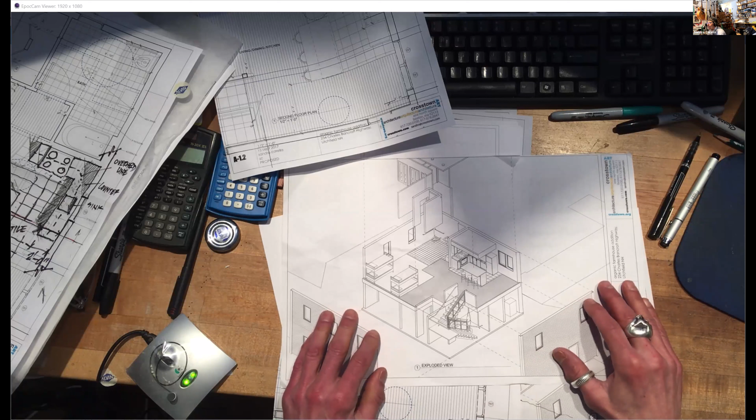Sorry about that. So this is an addition to a house that I designed in New Hampshire. Actually, one of our undergraduate students lived across the street from it. So I'll do a little bit of show and tell about this project. Let me share a different screen.

So now I'm sharing an internet browser. If you go to any Google engine and type in 234 Charles Bancroft Highway in Litchfield, New Hampshire, it takes you to this street view. Across the street from the house is this school.

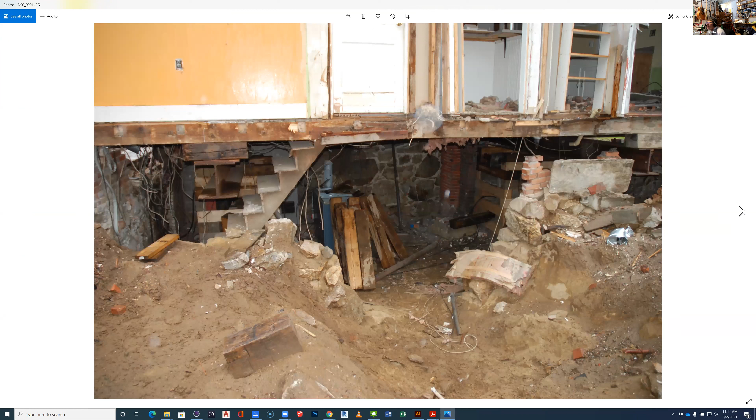So this is what we did. I found a company that was able to do this. This is what the house was like in the basement, as we dug out around it before lifting it up. So it was very, very tenuously founded. The foundation was very, very, very coarse.

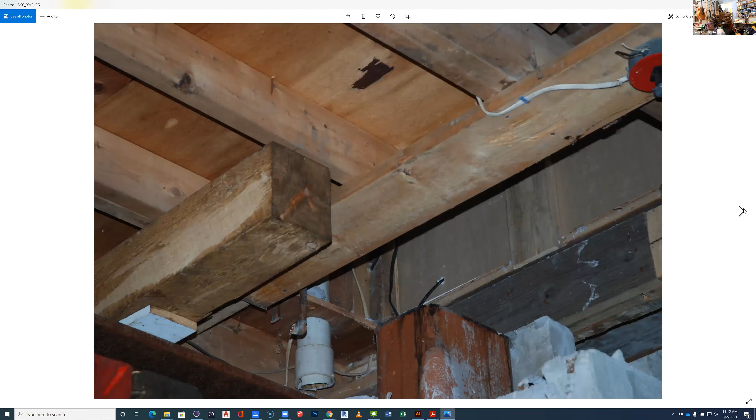So we started digging up around it. And these are the guys. This cost about $7,000 to do.

I took a bunch of pictures beneath the house, because in order to hold the house up, I had to design a new set of columns and basement. So this is what's called cribbing—wood blocks, piles of wood blocks that are railroad ties, just sort of piled up one on top of the other that the house would rest on, right?

And somewhere I have this on film, but I couldn't find it. When the town learned that we were doing this, we went from public enemies to town heroes—people were inviting us home. And I learned something really, really important when doing this. That's my pickup truck way back there. I miss that truck, I crashed it.

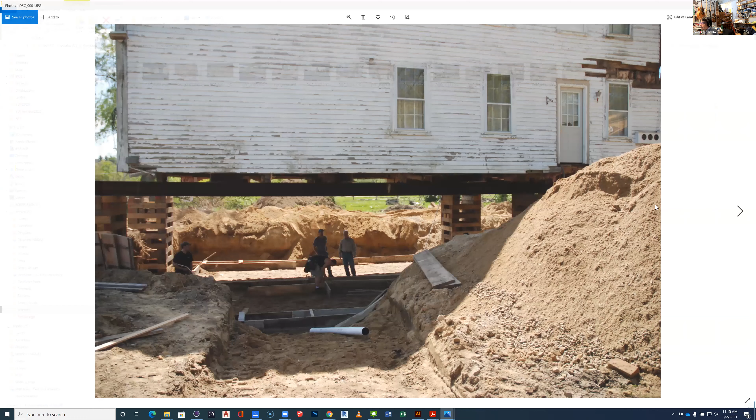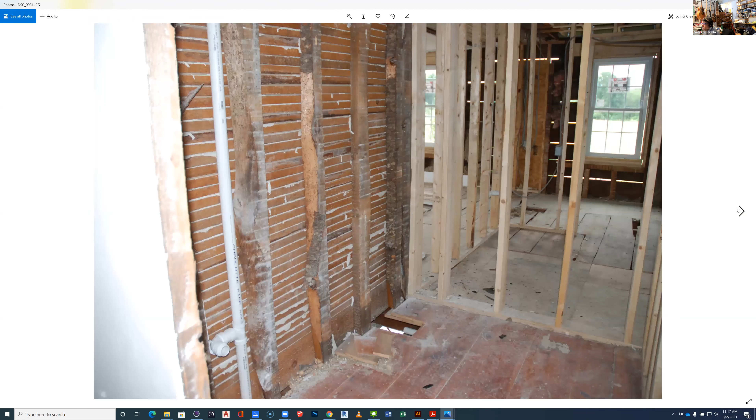This is all going, I'm explaining all this for a reason, and it has to do with diagramming. And I'm going to show you a picture.

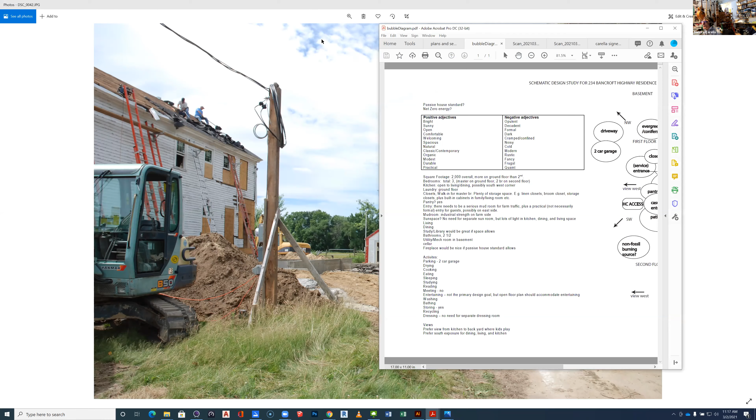So do you see a PDF drawing now with a diagram? Okay, so I'm showing the screen. So before I started anything here, I basically tried to get an idea of what the client needed.

I don't expect you to do as complex, this is what's called a bubble diagram. And what a bubble diagram does is it creates sort of an item list of program elements that your proposed intervention is going to have. Most importantly, it indicates relationships among those things, right?

So the drawing of the original house, these are plans that show the new basement, which is over here on the left, and how the first and second floor of the house were going to work. That's phase one, was to renovate, right?

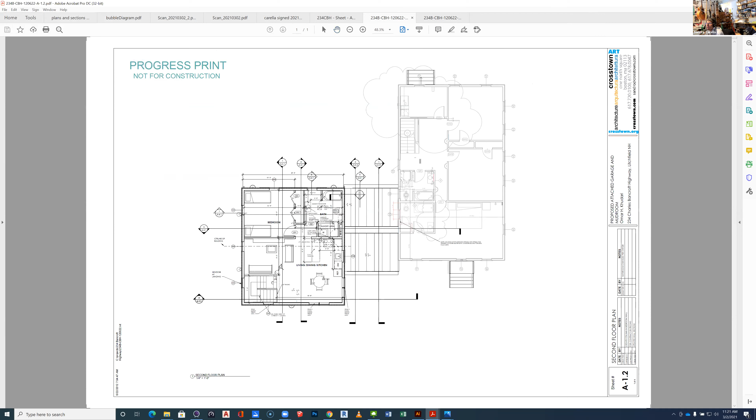Okay, looks a little bit different than that. I did something slightly different than that. But for the most part, this is what was constructed.

So what about a bubble diagram? I'm going to share now.

Remember that, and you have plan drawings of this house, right? For the most part, we focused, we're going to focus on the kitchen area, and that's what we're drawing in from different points of view. So let me share.

Let's go back to the maps again, right? So you can see what was constructed here, right? So for purposes of this class, I make believe that all this stuff isn't there, and we just sort of highlight the different aspects of this house.

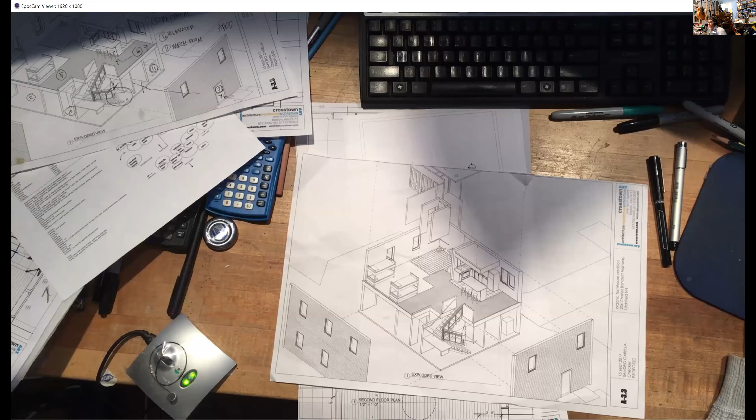Okay, so let's go back. So what about the bubble diagram? Well, the bubble diagram that I used for the house was much more complex because I had to describe the old house and the new house and all the things that went with it. And I can show you that.

But what we want to do for this house is create an inventory of the elements, the design, the programming elements in this house. And it's really as simple as imagining yourself walking through the house. Let's imagine that we start.

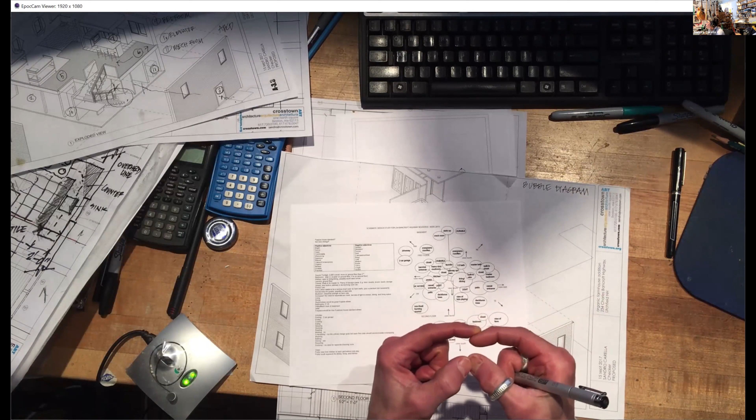So we want to create a bubble diagram. And the bubble diagram is not a scale drawing, right? The diagram doesn't represent things in relation to each other in accordance with how large they are relative to each other, but they indicate proximity, relationships to each other. So we start with just identifying what are the parts of the house.

Entrance, right? I don't know why I'm getting... oh, I see. You could think of this as a narrative.

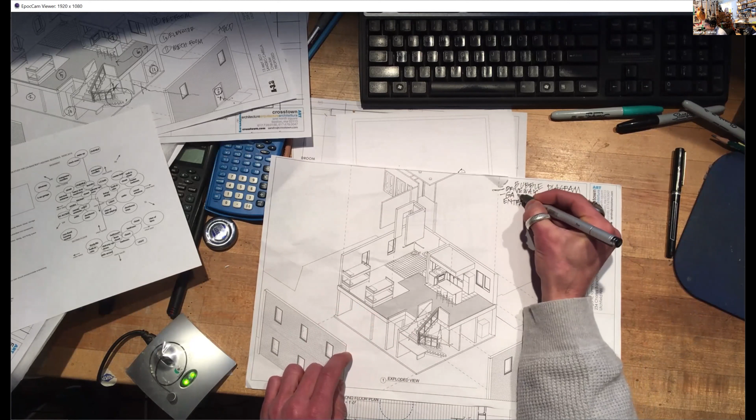How do I experience this house? Really, when I go to this house, if I look at the place in New Hampshire, I really ought to start with driveway, right? Because I drive up to the house. And then I enter the garage. Then, depending on if I drive a car into the garage, let's number these: 1, driveway; 2, garage; 3, entrance.

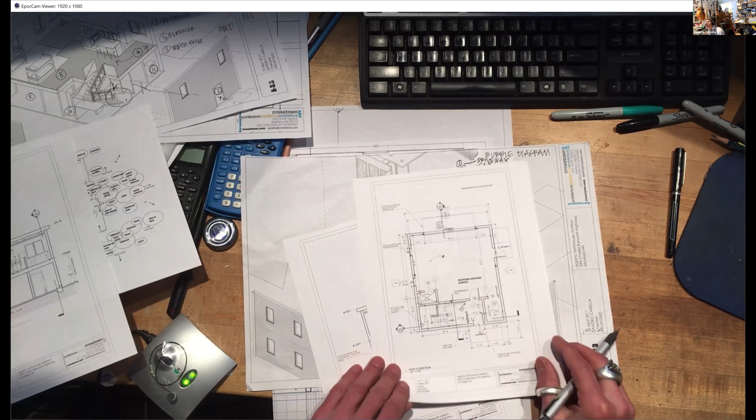There's more than one entrance, right? If I were walking from the street, right? And again, remember, I'm ignoring the fact that this is actually connected to the house, and there are doors on the other side, and we will back and forth be referencing the plan drawings. I don't think that I sent you both the first and second floor plans. I have them here, and I think I posted them up on Blackboard. Okay?

But consider this. If I drive into the house, I enter into the garage, right? So we have an automobile here. This is a garage. That's number 2. Then I have an entry from the garage, but I also have an entry from outside, right?

What else have I got here? What are the other elements in this house? Well, in this house, I have an elevator in these drawings. We did not build an elevator into this house. Surprisingly, one this size actually fits. And again, that was to present you guys with an accessible solution to this simple 2-story house. So we have an elevator, that's number 5.

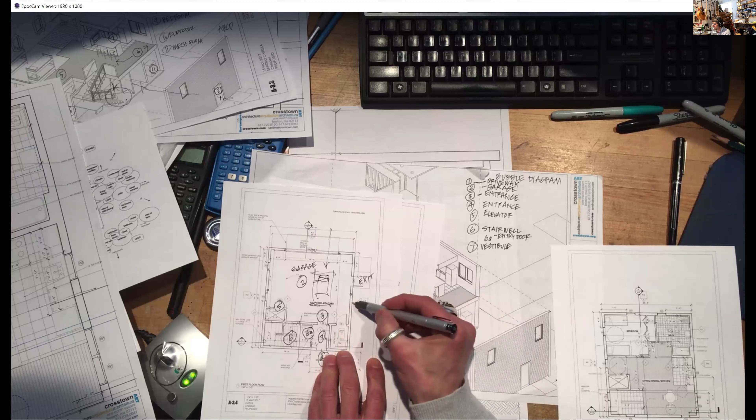I'm looking at this drawing and I noticed something that I forgot. There's another entry/exit from the garage, and in the real house this actually goes to the breezeway. Breezeway is a term used to connect buildings that aren't otherwise attached. Sometimes they're enclosed outdoors.

I just discovered that my pen comes apart. I think I'm going to use a different pen. What a stupid design.

Let's go to the second floor. Oh, did I identify the stairway? Yeah, so when I get to the stairway is when I begin to enter into the house. So this you have a plan of.

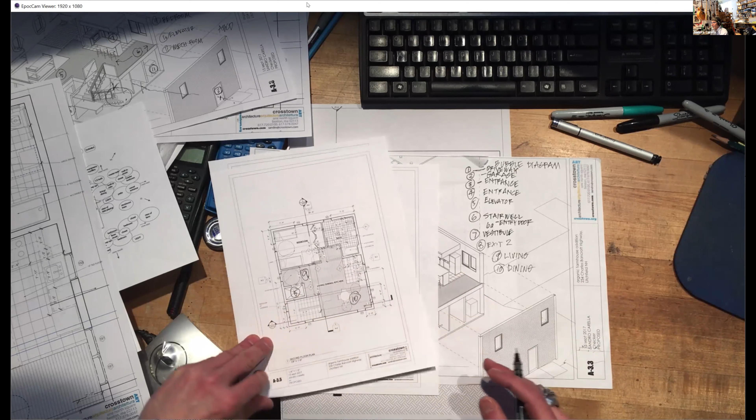The elevator occurs here as well. Remember, an elevator—you guys aren't responsible for constructing an elevator. But in terms of planning for an elevator, you have to draw every place that elevator stops. So if you're drawing a floor plan of the first floor and the second floor, you've got to draw those elevator stops, and then whoever the elevator manufacturer is, it's his or her business to figure out how to build that. But for all intents and purposes, you have to allocate the amount of space and the walls that surround that elevator. So your job is that.

I've had students agonize over how do I build an elevator—I don't know anything about elevators. You don't have to build an elevator, but you have to indicate where the elevator stops and the walls, the wall enclosures that wrap it.

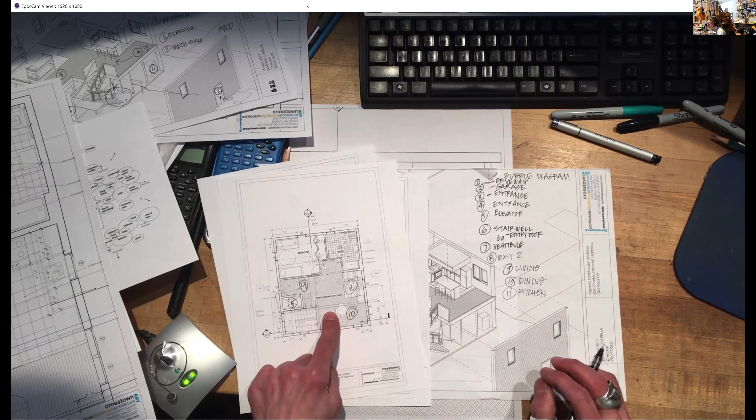We have a kitchen. Some things are missing in this drawing because—I'm not sure why, but I'm missing the island.

There's a bathroom, and a bedroom. What's that?

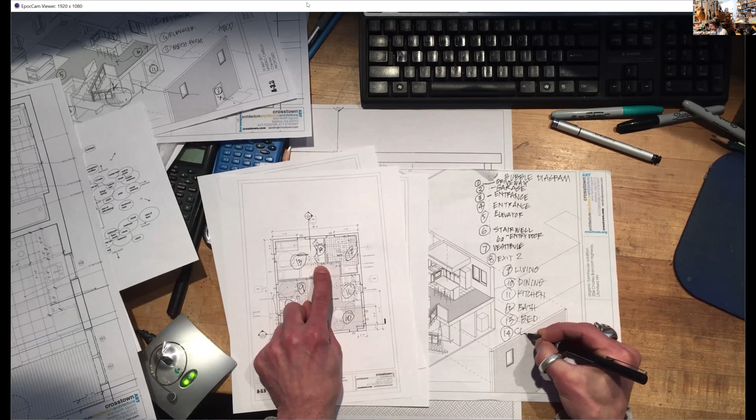Let's see if I left anything out. Let's go. That's a mechanical room. I'm just using numbers, but that isn't necessarily important.

So this is a list of the elements in my—HVAC means heating, ventilation, air conditioning—otherwise known as a mechanical room.

I left out exit 2. There's another door over here. So at some point you have an inventory to construct a bubble diagram.

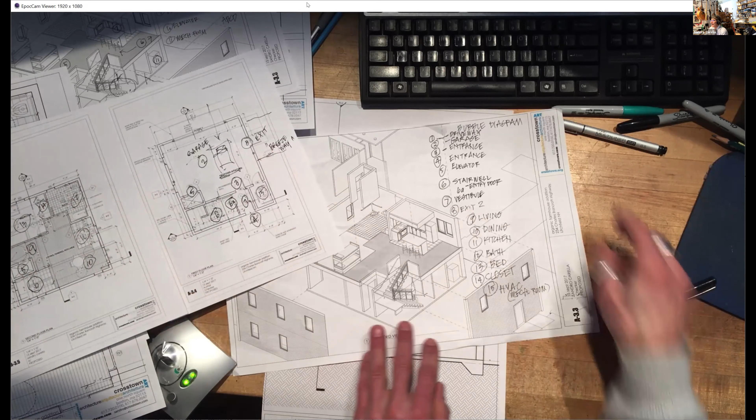But you will start with something, and you'll say—just imagine somebody told you, I need a house on this organic farm and I need all these things. You know what I've been told? What we were told by real estate agents.

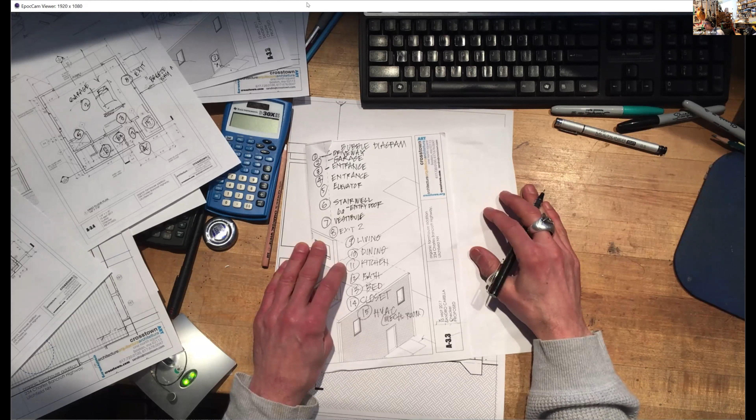Some multifamily housing that we designed—the realtors, who were women, looked at the plans and said, I could tell these plans were designed by men. And we looked at each other and said, yeah, you're right. Well, what makes you say that? Because there's no place, there's no storage—no place to store anything. So I learned a lesson, a long time ago, to be really careful about providing for storage, because I don't know if it's a gender-related deficiency, but it seems to be true that men are prone to leaving out storage.

So for instance, if I were putting together a bubble diagram to examine—let me see what I have in the bubble diagram I did for the farmhouse. Let me share that screen again.

Laundry, heavy duty mudroom. Keep in mind now, this is two houses and a mudroom or breezeway that negotiates between them, that connects the two of them.

Living, dining, kitchen, pantry, handicap accessibility, a casual entrance.

One of the things the owners describe is that we want to come home and there ought to be a place where when I enter the house, I go directly into the kitchen because I want to drop off groceries or things that I've purchased. How many people live in a house where there's a separate entrance to the kitchen, or you go into the house and straight into the kitchen? There are reasons for that.

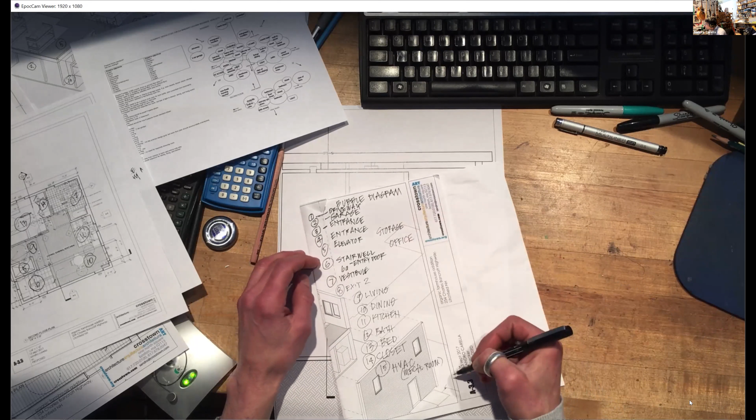An office? Yeah. Adding an office is going to make this place bigger, but if an office is part of the program, we might need a bigger house, right? If it's going to be a separate office.

A coat closet, maybe, coats. Let's see, 15, 16. This could be a home office.

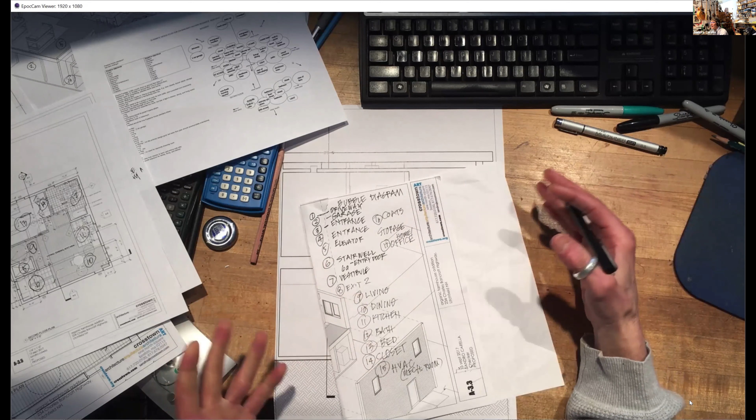Be creative. Think if there's something that you want to test out, you want to add to it, right? This is—you're not going to get graded on the accuracy of your bubble diagram. We're doing this exercise to understand the purpose of the bubble diagram.

So now we need relationships between these things. And I think one way to think... I don't know why that happened. One way to think about that—I always draw on trace, so why change things?

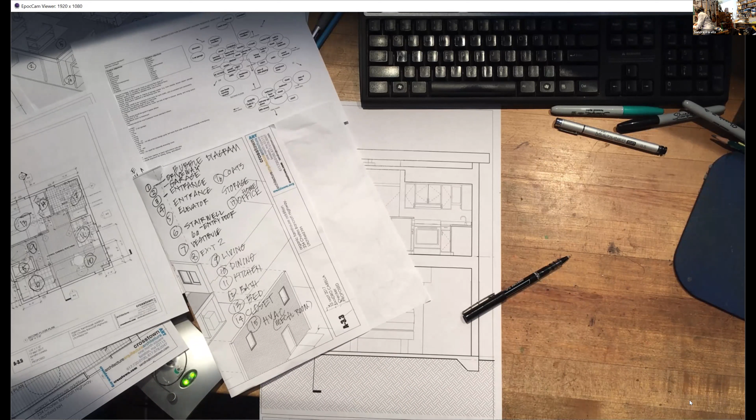Sandro, is it a laundry room? Oh yeah, a laundry room would be a good idea, right? And that's okay, to think of things I may have missed. Laundry, 18.

One way to think about organizing a bubble diagram. Can you see what I'm writing? Let me draw it with a thicker pen. Let me find one.

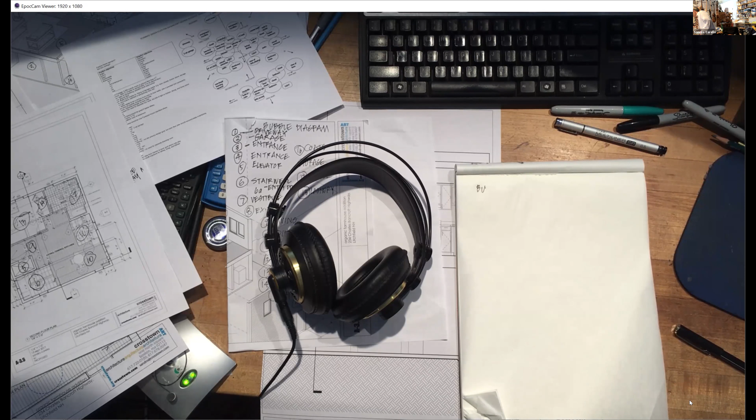If this gets too heavy, I will restart the bubble diagram.

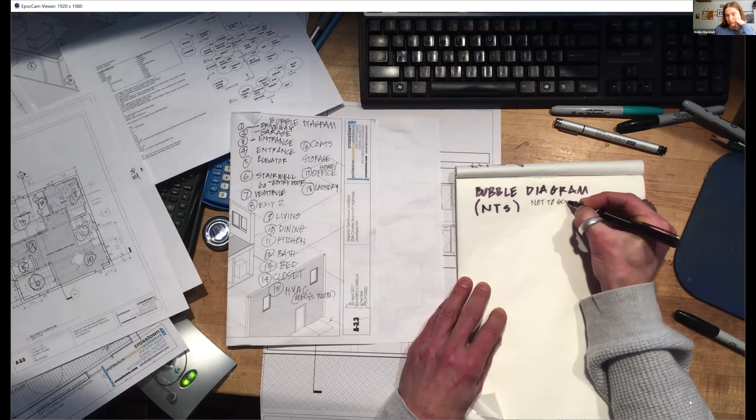What does NTS mean? Anybody know? Not to scale, yeah. When people see a bubble diagram, they know that, right?

So I'm going to start anywhere. Garage. I think I identified the driveway. So very simply, I go from here to here. I have a garage entrance.

That's kind of like the back door. I think we identified it as being back there, right? Did I separate the vestibule? I did.

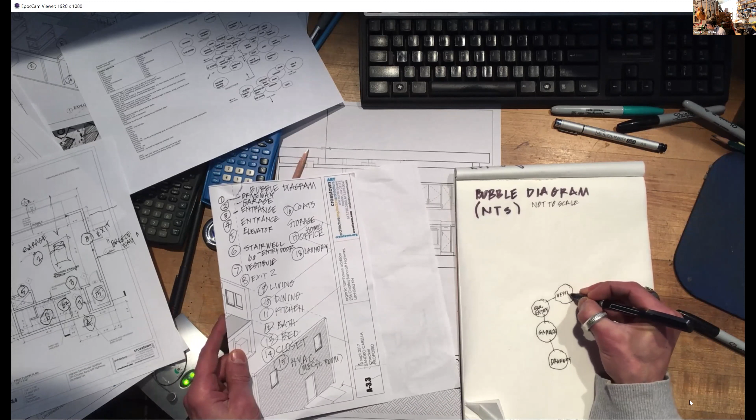When you do this on the computer, it's a lot easier because you can move these things around. When you're drawing, it's so easy—you quickly paint yourself into a corner.

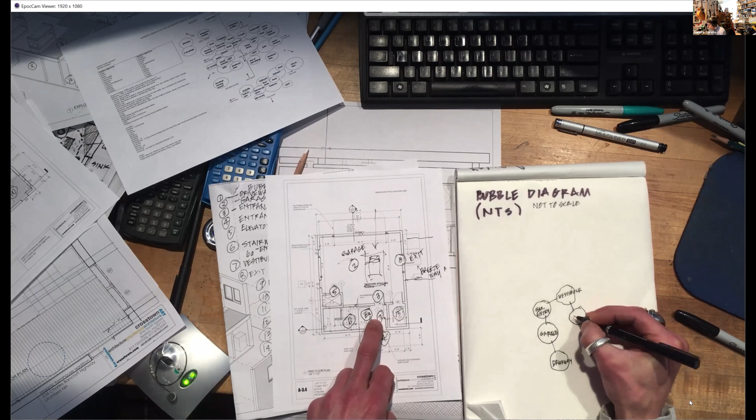So already I'm starting to see, okay, there's a vestibule, but wait a minute—there's another way into the house. That vestibule also connects the entry, that second entry. What did I call it?

Exit 2, let's just make it exit 2. And maybe I didn't identify it, but that's from the backyard. So I'm creating a drawing of a house by identifying a sequence of design elements that are connected together, that have a relationship to each other.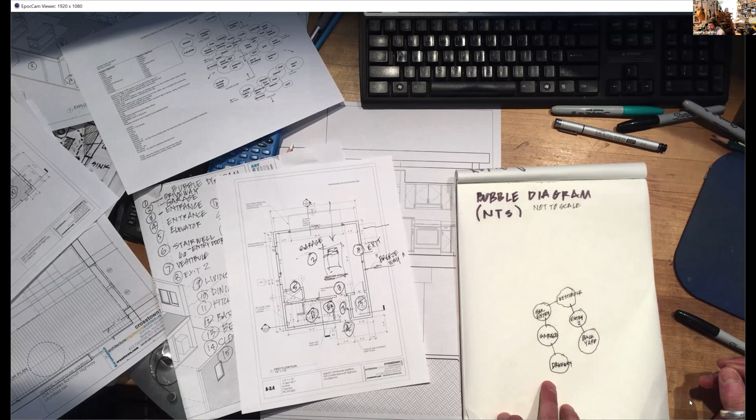Where do I need to go next? I've got to enter the stairwell. So the stairwell has an entry. Six A. To stair.

How do I get to the apartment? I have to go up the stairs, right? Is there any other way to get into the apartment? How else could I get into the apartment? I'll give you a hint—it begins with the letter E. The elevator. Yeah, right?

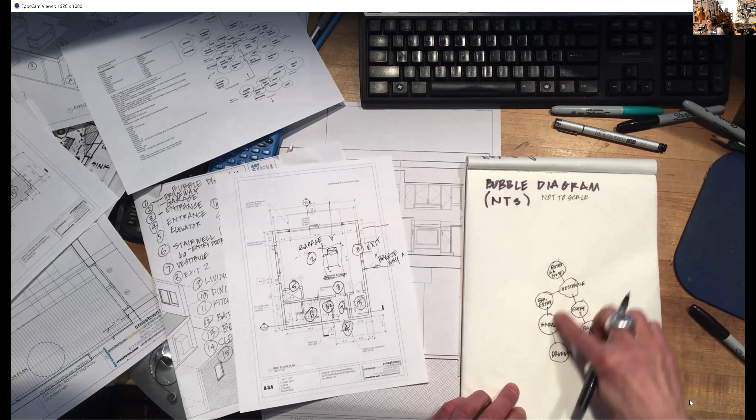This is what I mean about painting yourself into a corner. Where does the elevator fit into all this? How about—is that right? I go into the garage, I can get to the elevator.

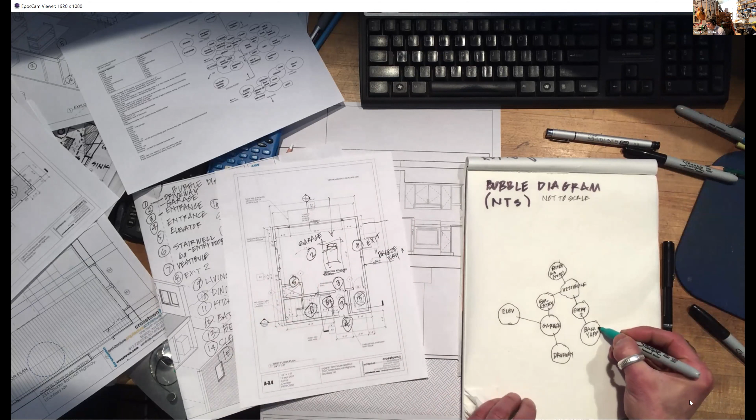I can also do this. Now, see, here's where I'm—again, backing into this is a little bit different. Entry sequence into the house. If I came in, if this is my backyard...

This thing barely writes. Let's try something else. Backyard. Oh no. Whatever. I can bypass the stairwell by doing that.

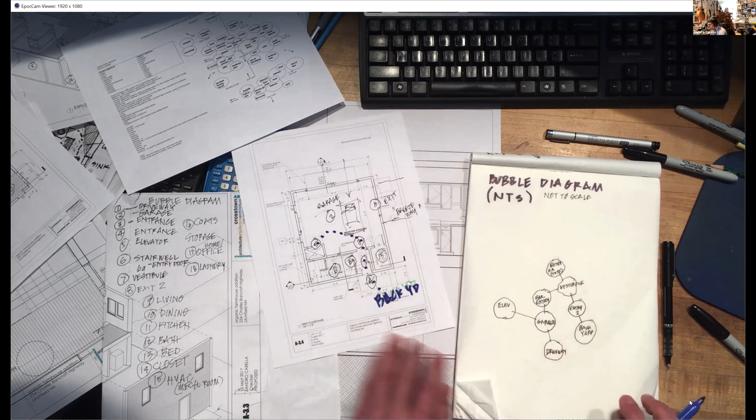Garage entrance, so that was garage entry was 3. 4, what was 4? That's the backyard entrance—that was 4.

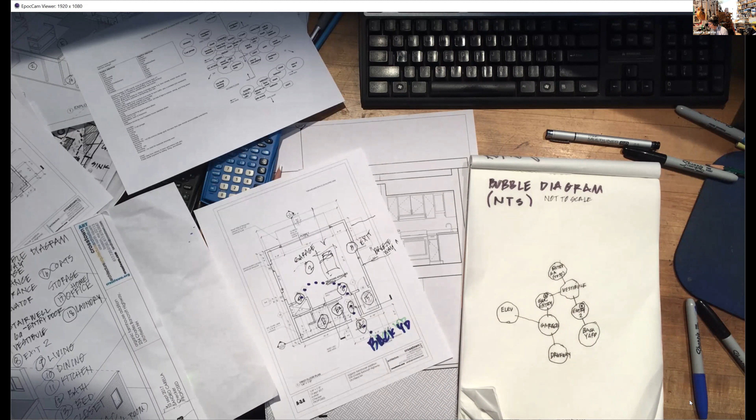I haven't even drawn the stairs yet. Why? Because there was a consideration of an alternative way to get into the apartment.

So I can go from the backyard to the second entry. Then I got to go back out—oh, I'm in the vestibule. Then I got to go back out the garage entry, to the elevator. So that has a connection, right? Elevator and the garage entry.

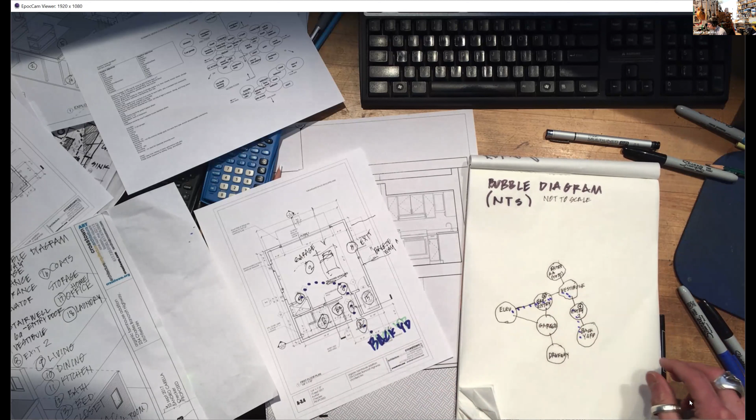Well, I'm sorry—technically, I'd go back into the garage and then to the elevator. So here's my path. This never comes out right the first time. Of course, it's different when you haven't designed the space, but you're thinking about how things fit together.

What haven't I drawn yet? The stair.

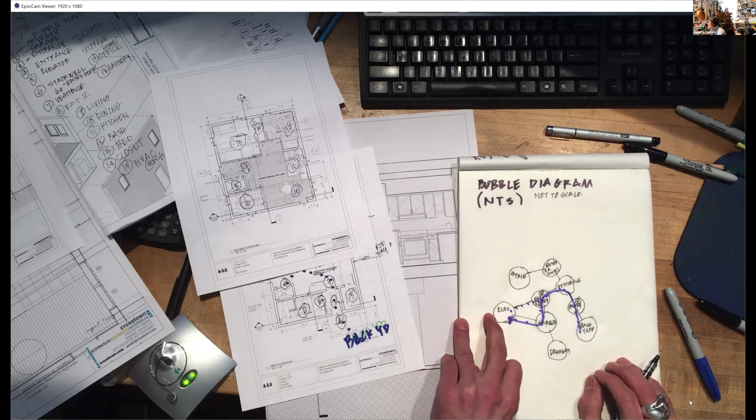Where do I end up when I enter the house from the elevator? In the living room. Very good.

Where do I end up when I enter the house through the stair? I would say pretty much the dining room, right?

Once you get to a point and you start looking at the plan, now you think, alright, I'm here, what can I get to from here? I can get from living to dining. I'm missing yet kitchen. I can get from dining to the kitchen. I can get from living to the kitchen.

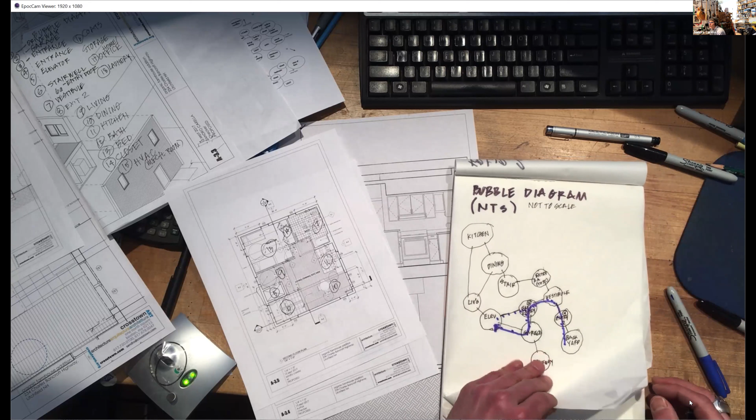I'm going to cheat. Let's hope the wind doesn't blow this away. I have a bedroom. Bath. I left out office. And I don't have an office in the plan.

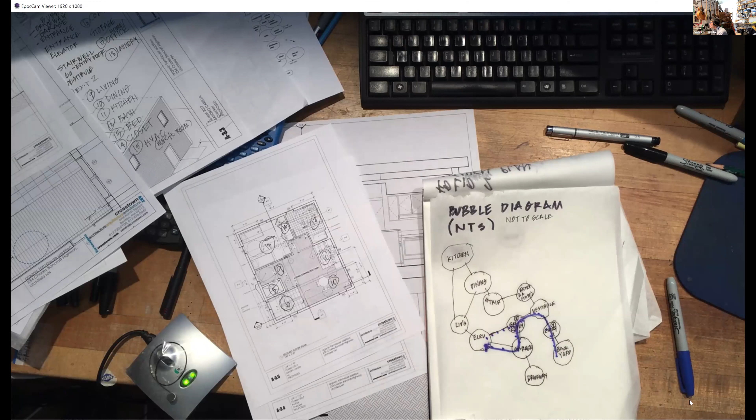Where would I add it in my bubble diagram? If you didn't have a drawing in front of you, how would you think about where the office would go? Can somebody suggest a way of thinking about where the office would go? I don't have drawings, but I'm making one of these.

Off the living room? Yeah, that's one option. I don't think there's a right or wrong way, but where else could it go? Could it go next to the dining room? Or like by the stairs?

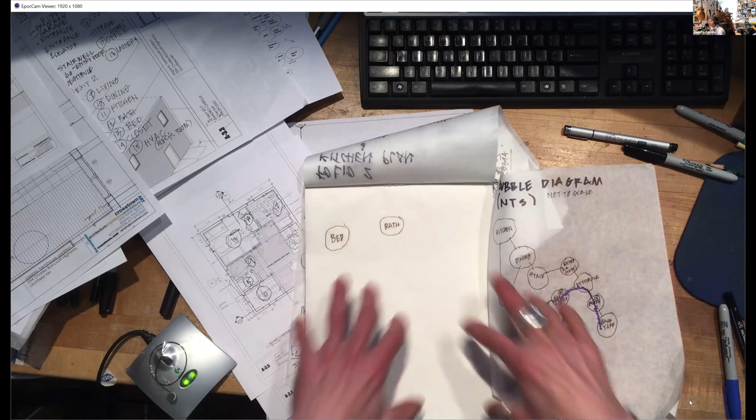It could go there. Okay, here's another way of thinking about what am I looking at here in general. What's another way of organizing what's going on over here? Or what's a way of identifying, or another grouping?

Well, floor level, right? I'm not going to drive into the dining room, right? That's probably unlikely.

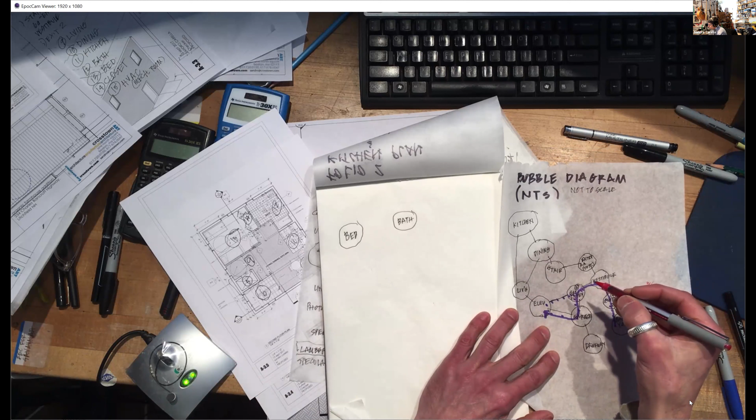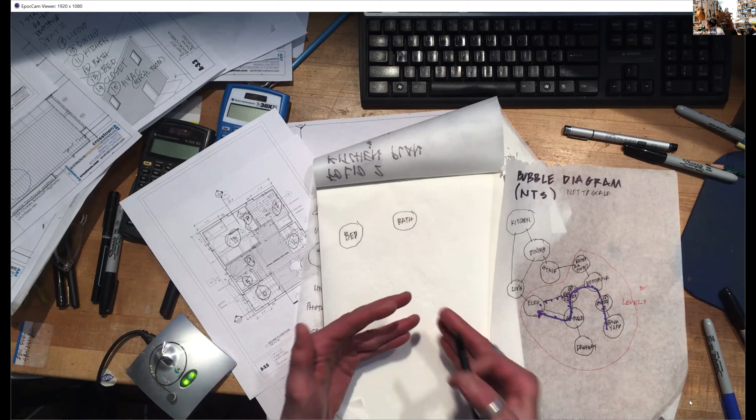No, sorry, yeah, level one. Maybe somebody would have a preference to be able to get to the office and bypass the house altogether, right? So maybe somebody wants that to happen. Naturally, the plan's going to have to get modified.

I had a client whose house I designed that incorporated an office nook into the kitchen. He actually wants to add on to that house. So if that were the plan...

You might have an intersection, right?

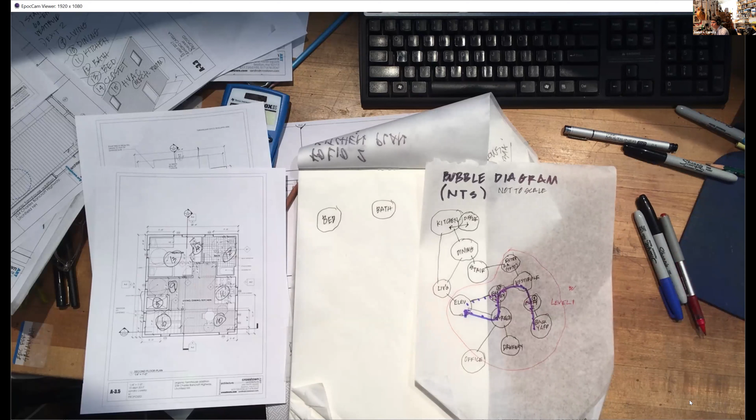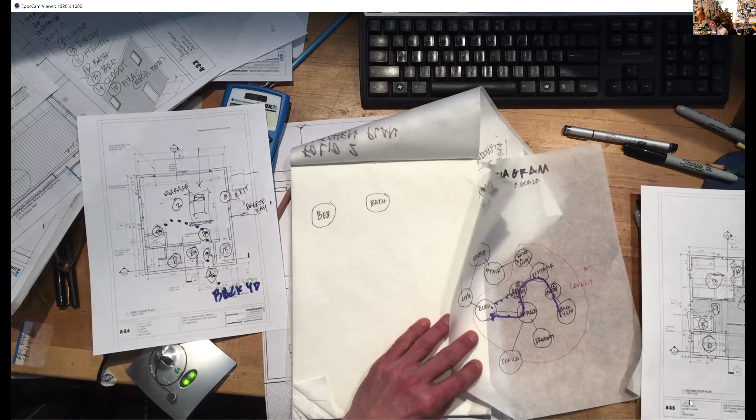One of the difficult things about a space like this, I am always trying to mask the entry to a bathroom from the eating area. So what I actually did here was I created a wall just so that people had to go around. I took some liberties with changing these drawings, but the idea is that technically in this drawing, you can go from the kitchen to the bath.

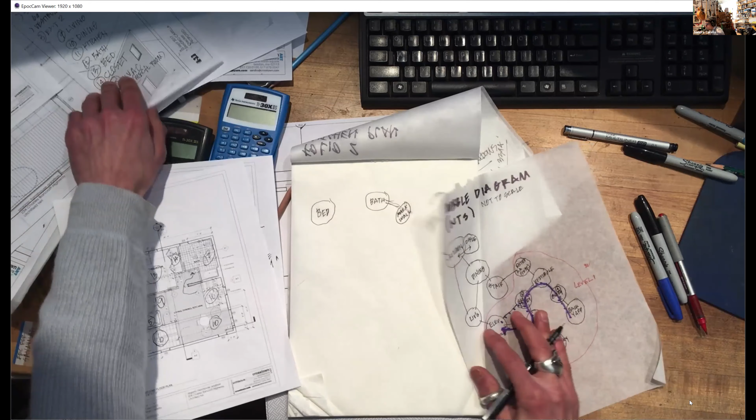Let me get a piece of tape because the air heat is going to blow things around.

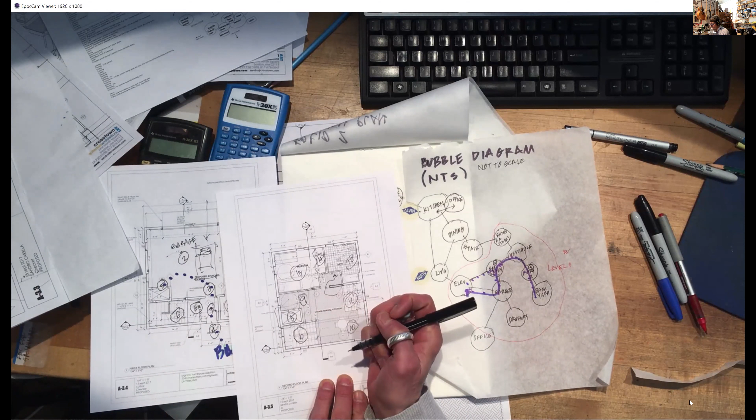I actually didn't build this elevator, and put a little storage area underneath the stair landing. I'll show you some pictures of that afterwards.

There appears to be a direct route between the bedroom and the bathroom. That's good. There's a route from the kitchen to the bedroom.

I could have identified this area as a hall, in which case the hall negotiates... I would have to correct all this, right?

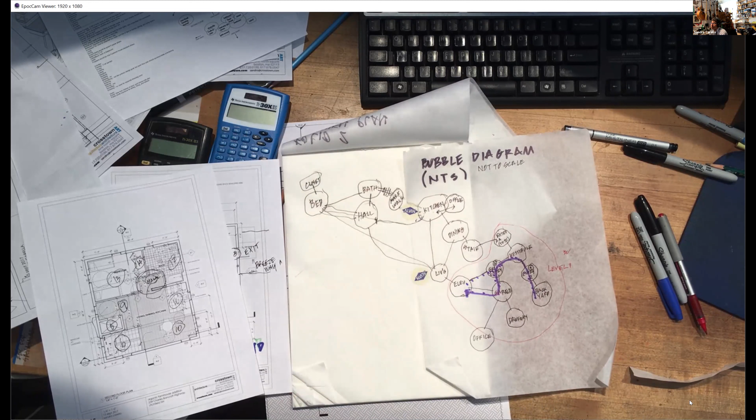So I go from kitchen to hall and then the bath. Kitchen to hall to bedroom. Living to hall to bedroom. To get to the closet, go through the bedroom first, right? What a mess.

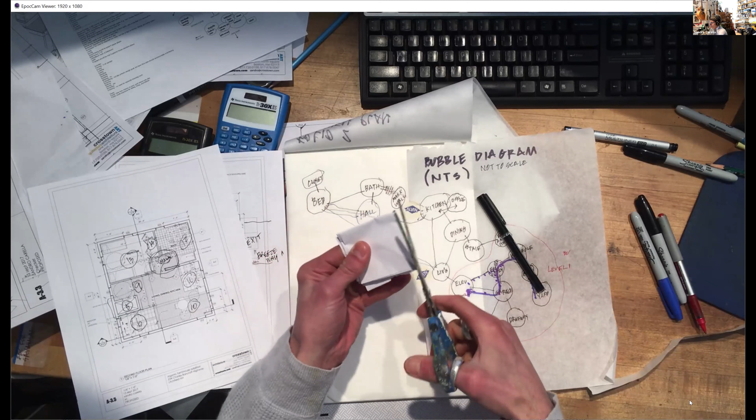What's another way I could have made this drawing? I'm not going to prevent you from being creative and thinking through other ways of presenting or communicating the same information.

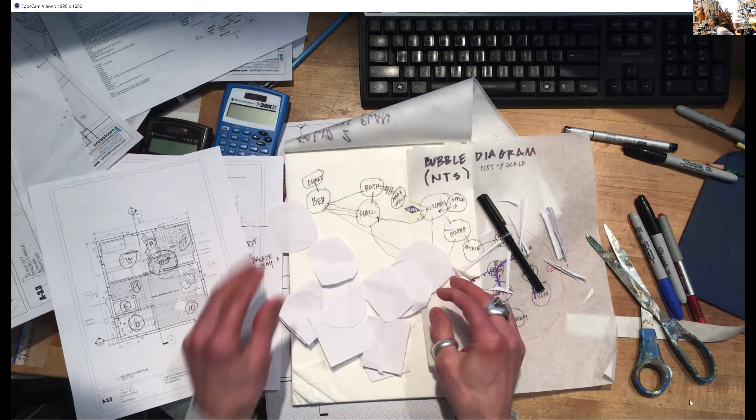Alright, if you want these to be round, I suppose you could do something like that. This would make life... you get the idea, right?

Suddenly I'm free to move these things around and really think about it. So what I'm doing is thinking about, I start with, I've got to build a house. I think about the experience of...

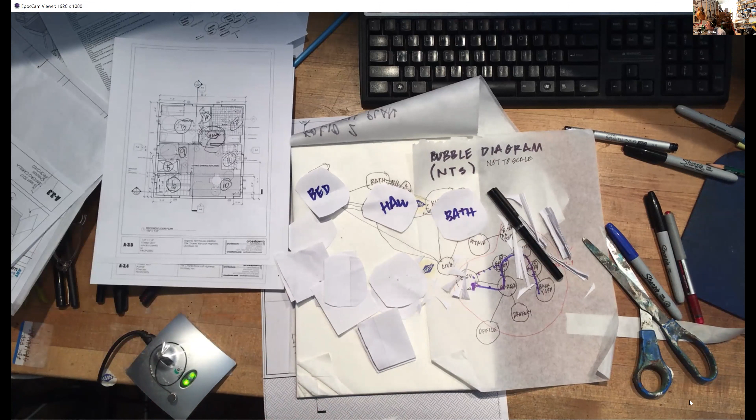We can't hear you. I'm sorry, I inadvertently turned that off. Could you not hear me throughout? No, it was just like the last 30 seconds or less. Okay, good, you could hear me do this.

Cut these things. So that's a way of thinking about it. Or maybe you do this with pieces of paper and then you draw it.

I don't want to limit you—maybe you make something that's three-dimensional, right? But so what's a bubble diagram? This is what a bubble diagram is: relationships.

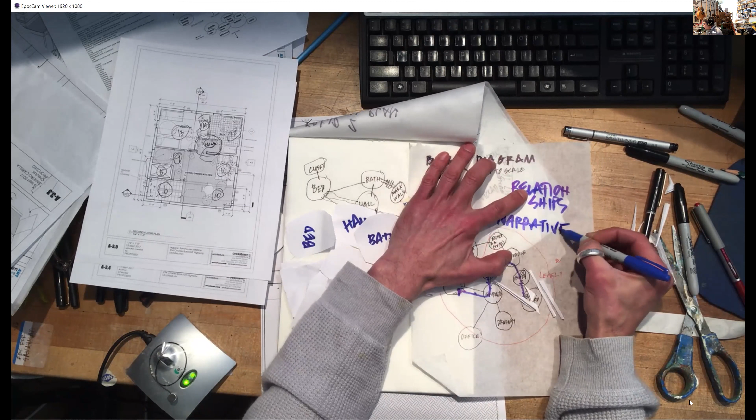And it's useful to think of a narrative. What's a narrative? A story. Time. Proximity. Sequence.

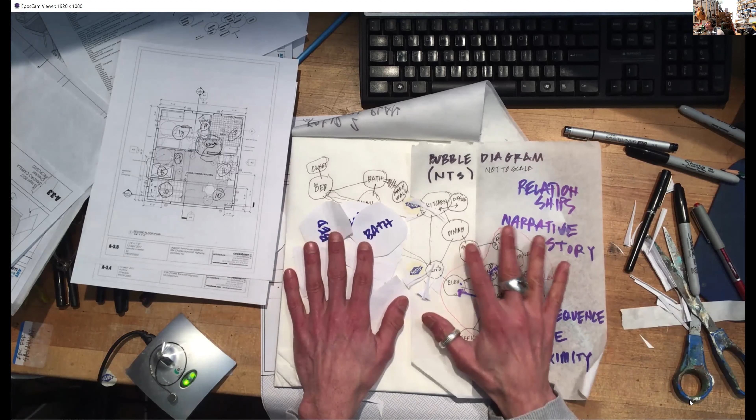After a while, when you have an idea for a program, or when you have an idea for a thesis or a studio, a proposed use, you think systematically about those elements. This is before you've even decided how big they're going to be. This is a process of identifying what the parts are. What moving parts does this thing have?

Then you can decide whether color is appropriate, has anything to add to it. People colorize these all the time. I never do, but then I'm a boring architect, and maybe I leave out a lot of things that people find more interesting.

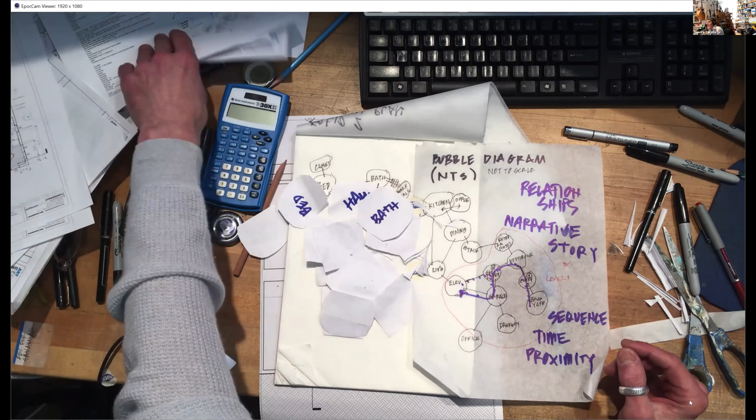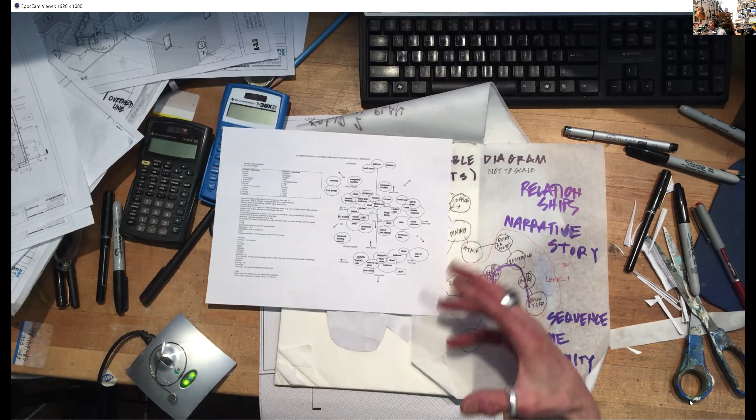So have a go at what you see on the second floor, maybe what you don't see on the second floor of the drawing, maybe what you'd want to add, and then have a little discussion about what that might imply for the space.

Usually when you go through it once, you discover a bunch of things that didn't quite work and you have to do over again, right? It isn't important that this fits together as compactly as I've done here. Naturally, a lot of attempts came before constructing something this concise. And again, remember, this came before I started designing the house.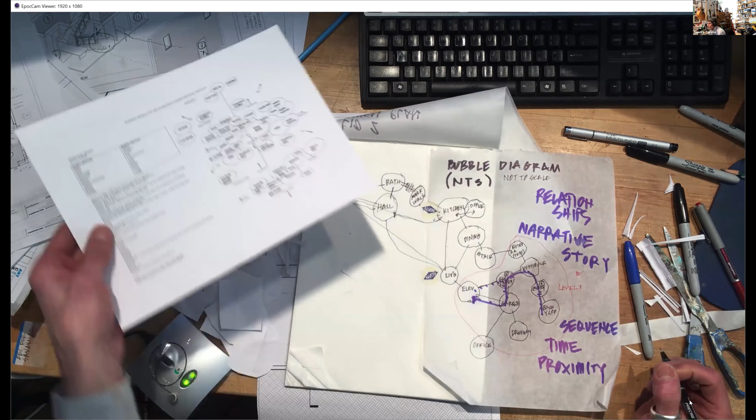You want to make sure that you identify all of the elements that are there. That's what a bubble diagram is for. Let's take a 10-minute break, and we can get started on this. You can work on that this afternoon, and I'll take questions as well, and we'll see what modifications we can make to this. I'll just leave this up on the screen.

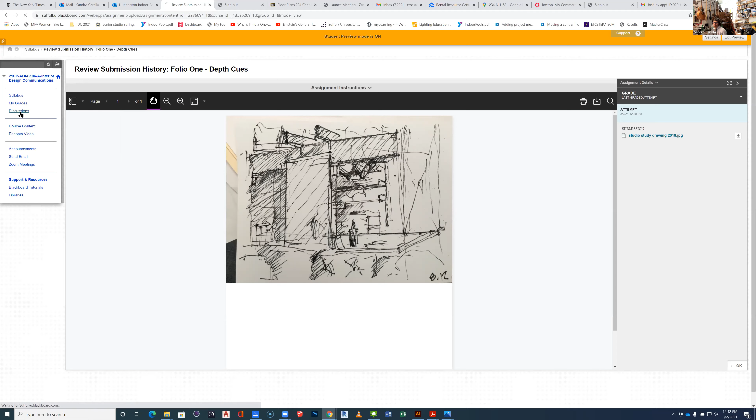Oh, I see. Because this way you can. Yeah, I don't think you can with this way. Okay. Yeah, I don't particularly like that. All right, let me give that a discussion. Oh, is that here? Discussions, this thing?

Yeah, it is. So any of you can start a discussion? So you create, I have to create it, yeah, and then we reply to it. So folio 1, then we add in our pictures, and see everybody else's pictures as well, and replies to it also. All right, well, let me think that through, and I'll have something that I think will work for us in place.

And I'll let you know this afternoon. All right. Meanwhile, I scanned the drawing. I'm going to exit the preview and delete the data. Floor plans. Okay, I'm going to add them to this folder. Ugh, this is so confusing.

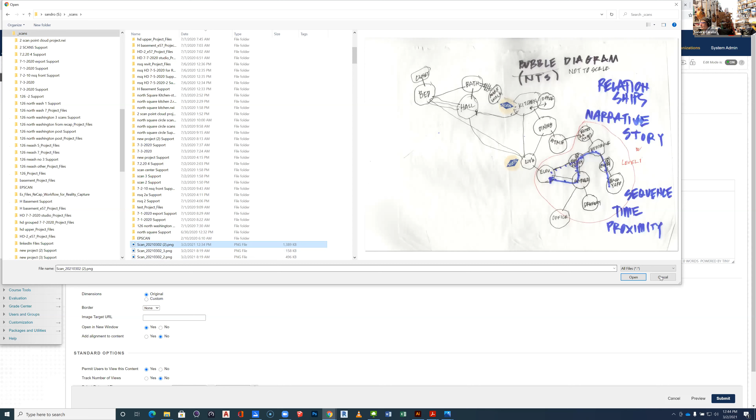Let me create a new thing. Bubble diagram. In class, 3/2/2021. Browse. Scans. Okay, so that is up on Blackboard.